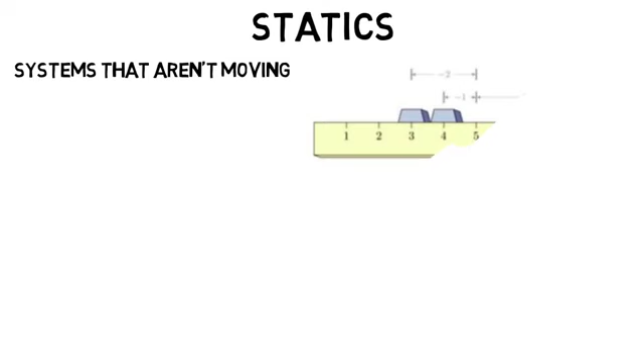All civil engineers will take a class called statics, which is all about the forces and systems that are not moving. In basic physics, you may have done a statics problem, like where does this support have to be for the system to be totally balanced and therefore not moving. You summed all the forces which equaled 0 and all the torques which equaled 0. And that's the basics of statics.

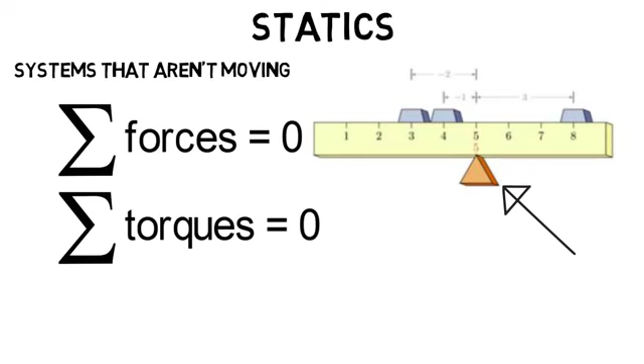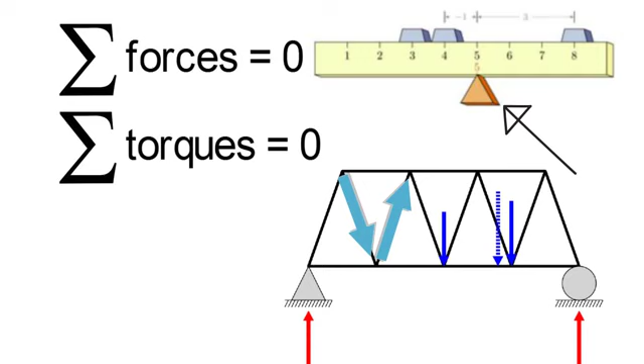So if you're looking at the forces within a bridge or truss, well, the same principles apply, but now there's just more to it. The weight is straight down as shown in blue, all the beams exert forces on one another, but the sum of them is equal to 0, and the torque sums to 0 as well because the bridge is not moving. And it's of course even more complicated than this, but if you enjoyed that kind of basic physics you see above, then you'll likely enjoy the statics and physics you see in structural engineering. So that's just a very simplified explanation, but now let's dive into some of the classes they would take.

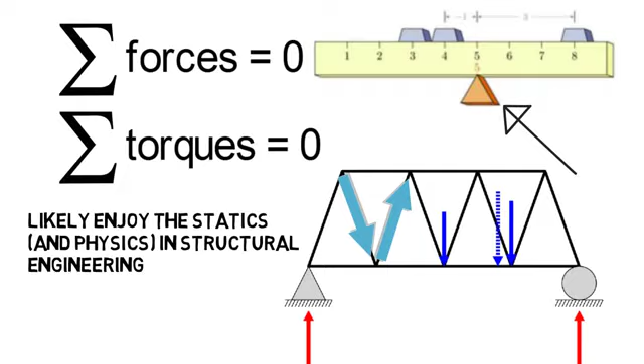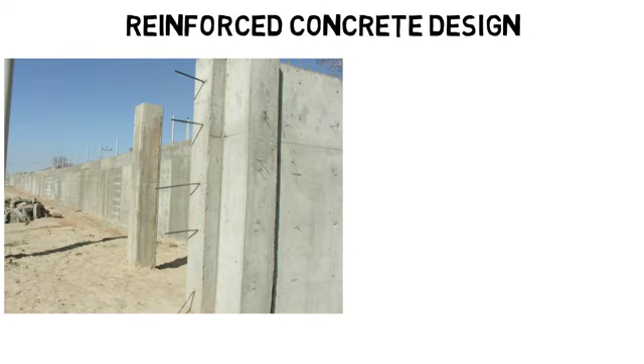One class that would be important for structural students is a reinforced concrete class. In concrete structures, they reinforce it by putting steel beams in the concrete. We can't see those beams, but here, before construction is done, you can see them sticking out. Or you can see a lot of them on these unfinished columns. So why do they do this? Why isn't concrete good enough?

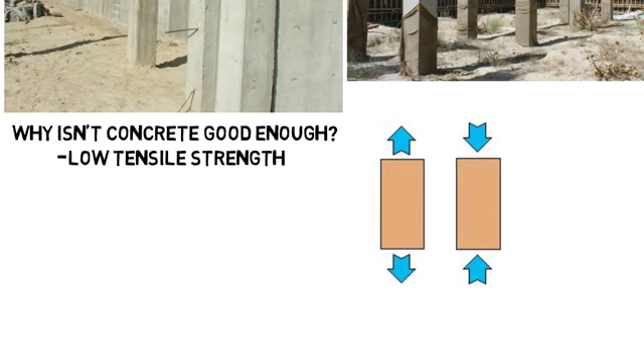Well, concrete alone, once hardened, has low tensile strength, as in it does not handle being pulled very well. However, it's okay with being compressed. But to counteract that low tensile strength, they add steel beams and pour wet concrete, which hardens around them, and then those steel beams have high tensile strength to counteract those types of forces on the structure.

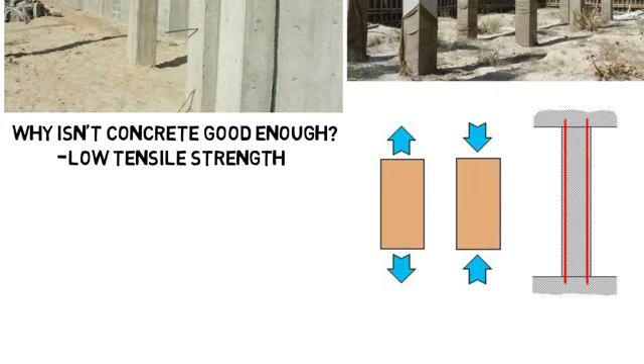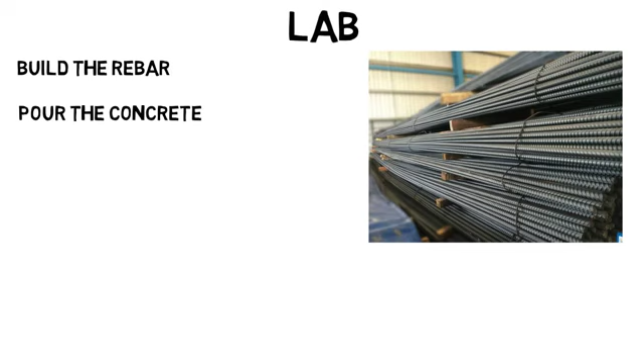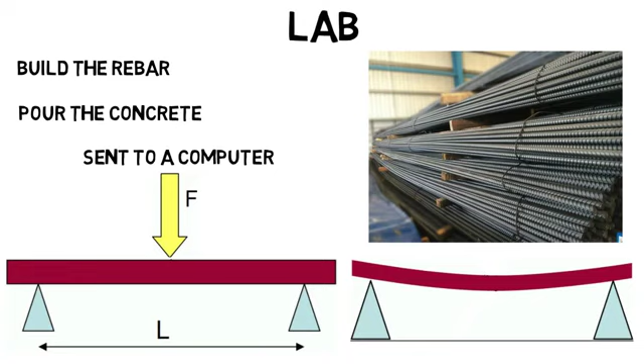So in a lab for this class, you might build the rebar, or the steel reinforcing rods, pour the wet concrete onto them, then once it dries, use a machine that holds the beam on both sides, then apply forces in the middle and keep increasing the force until the beam breaks or cracks and starts falling apart. That force being applied is sent to a computer that tells us the loading on the beam so we can collect the data and get the properties that we need.

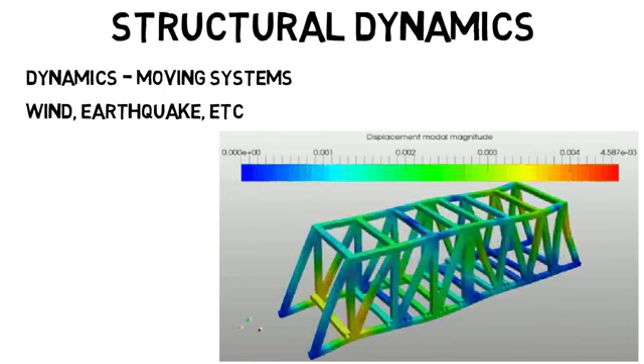You could take structural dynamics as an elective class. Dynamics is about moving systems, unlike statics. So this is one of the few classes where motion is included. So whether it's wind or an earthquake that shakes a building, you need to know how that motion will impact the structure itself and all the forces within it. I've shown this animation before, but mostly for mechanical engineers as it's a vibrating system that they could analyze, but civil engineers could get into this as well. They have to make sure their designs can stand up against any type of movement the structure may be subject to.

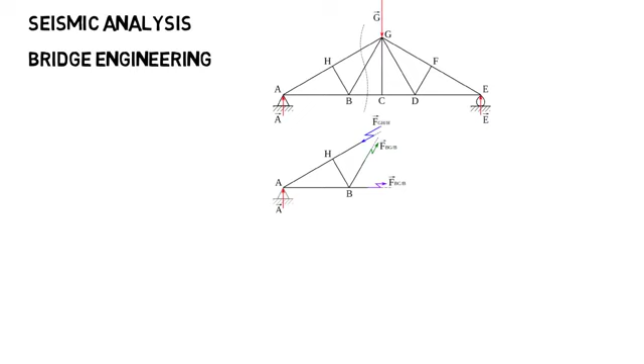You could take an elective class on seismic analysis, which is specifically about calculating the responses of a structure to an earthquake. Or one on bridge engineering, which would be a class on highway bridges, materials used, distribution of loads, and how forces are spread throughout the structure, and so on. Mechanics of materials, like how twisting and bending a beam or column causes it to become internally stressed. Timber structure design, which is about analyzing properties and forces within wooden structures, and much more.

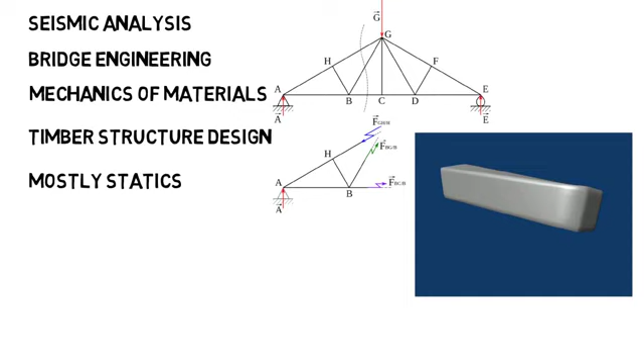You may still have to do hand calculations, but most of the rigorous analysis you learned in school will be left to the software.

Now let's move on to geotechnical engineering, and you'll already see how different these disciplines are. Geotechnical engineers are concerned with the behavior of earth materials like rock and soil, but the main focus is soil. This may seem odd, but you'll see how important this is.

The structural engineer can do everything right to make sure the building will stand up, but if the geotechnical engineer messes up and you put a structure on soil that can't withstand it or is uneven, the building could fall, sink into the ground, or even lean to one side, probably the most famous being the Leaning Tower of Pisa, which was a result of soil issues.

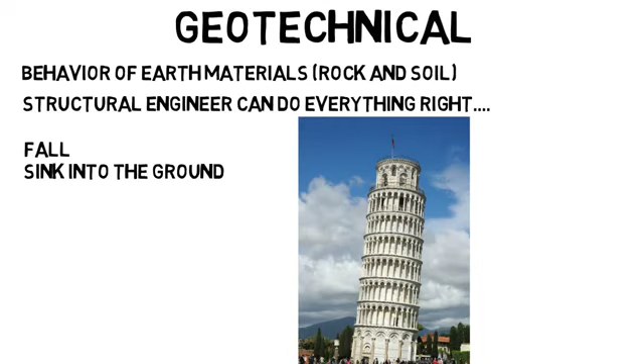Then they also have to consider the foundation of the structures that are being designed, like should they have a shallow foundation or a deep foundation. You may not realize it, but our houses and all the buildings you see have foundations that go underneath the earth to keep the structure as stable as possible by transferring the weight from the structure to the earth.

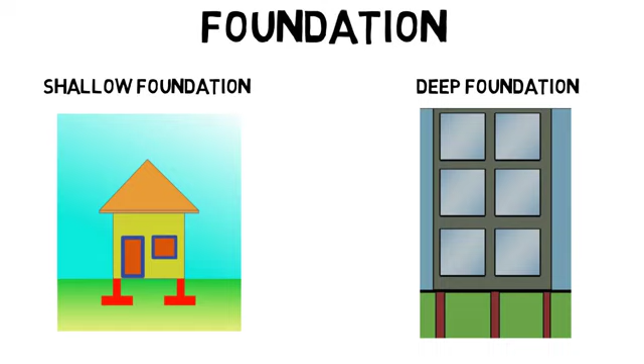But geotechnical engineers rely heavily on testing. So a lab you might see in college is to go out as a class and collect soil samples around your university and bring them to lab. You would have to classify it, like is it sand, gravel, clay, etc. There are many soil types, and you may have to look at the grain size or how it reacts to water.

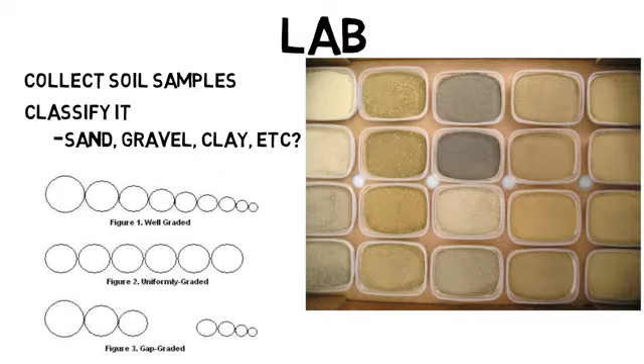You determine its water content by analyzing the sample, which will be comprised of solid soil, water, and air of different masses and volumes. But most importantly, you'll measure how the soil will react to mechanical loading or to different forces acting on it. So you might perform a triaxial test, for example.

Too complicated to explain for this video, but essentially you put the soil in an enclosed area and apply a force or load to the top, which pushes down on the soil. Then pressure sensors measure the pressure at different points to see how the soil is being affected.

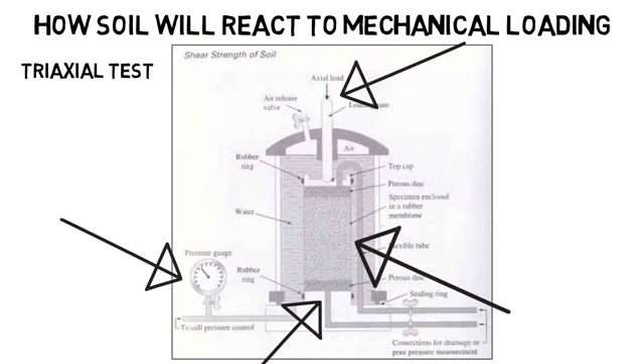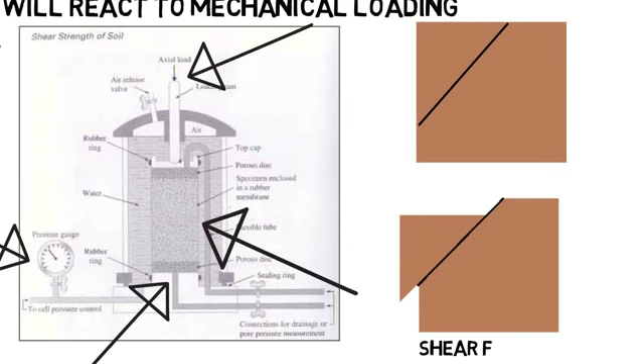If you imagine a square sample of soil and you add a force to the top, the soil can fail along some weak plane. Basically, the weight overpowers the friction holding the soil particles together, and the soil will start to slide, which is known as shear failure. Its ability to stand up to this is known as shear strength, which is one thing that the triaxial test on the left tests for.

And this leads us to what a career in geotechnical engineering could be like. You might be the person who goes out to the field where a structure is going to be built and collects soil samples all around the area for testing. Or you could do testing at the field.

One of the most used tests right now in this field is cone penetration testing, where a large truck goes out to the field which has all this equipment on it, and a cone is pushed into the soil, and the pressure will be monitored by a computer on the truck as it moves through the soil into the earth. Based on the pressure, you can analyze the soil mechanical properties.

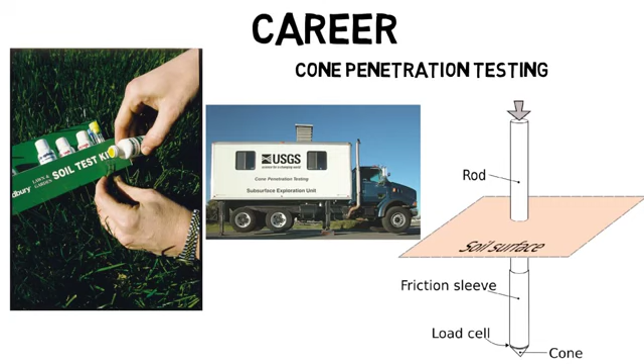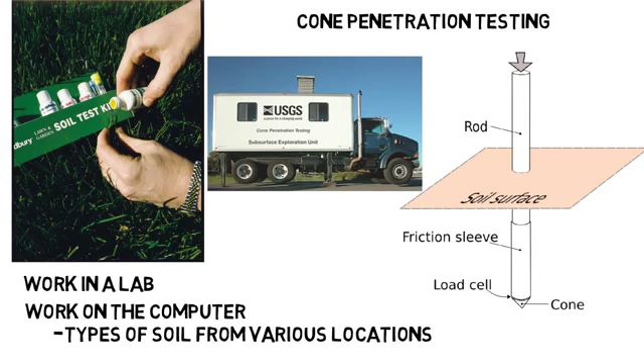Or maybe you could work in a lab where you would do the testing on the soil after it's been collected, like I showed with the triaxial test. Or maybe you could work on the computer and input the different types of soil from the various locations at the site so you can digitally lay out the area that the structure will rest on. So you could be in the field, in the lab, or on the computer.

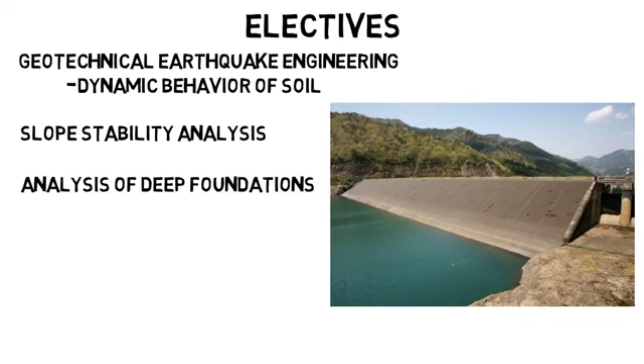Your elective classes could include geotechnical earthquake engineering, which would be like learning the dynamic behavior of soil as opposed to the structure itself. Then slope stability analysis and how to safely design structures on slopes. An example would be an embankment dam. Analysis of deep foundations, where the structure goes deep into the earth for a stronger support, like for skyscrapers. And of course, there are many more classes.

Now let's move on to water resources engineering. This is about the design of systems to manage human water resources. They can work on a water treatment facility, designing dams, pipelines, channels, canals, and so on. Maybe you have to design a storm drain system in the event of a large storm. Where is all the water going to go, and how will you get it to the ocean efficiently?

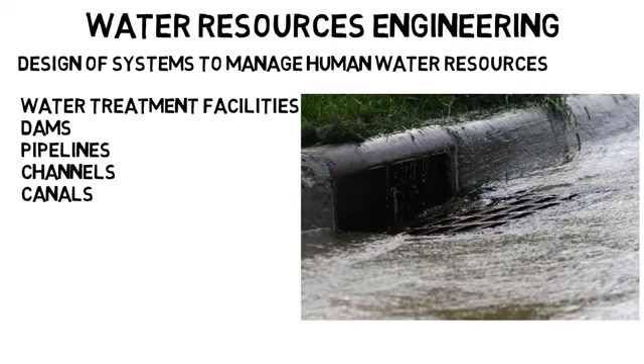Or you could design a canal, which is an artificial waterway to transport water for irrigation, or it can be used for ships and boats. Or you could design a culvert that will allow water to flow under a road or trail or some other obstruction.

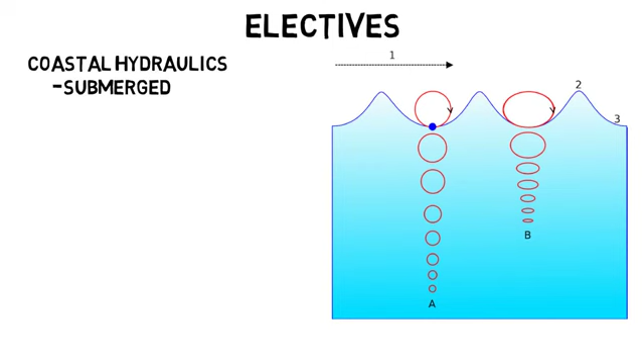Elective classes you could take include coastal hydraulics, where you learn about ocean wave propagation, submerged pipelines, seawalls to protect human habitation, and so on. Or open channel hydraulics, which is about fluid flow in an open channel as opposed to a closed channel or pipeline.

And last is transportation engineering. This is about safe and efficient movement of goods and people. These are the engineers who design streets, roads, highways, railroads, public transportation systems, and even airports.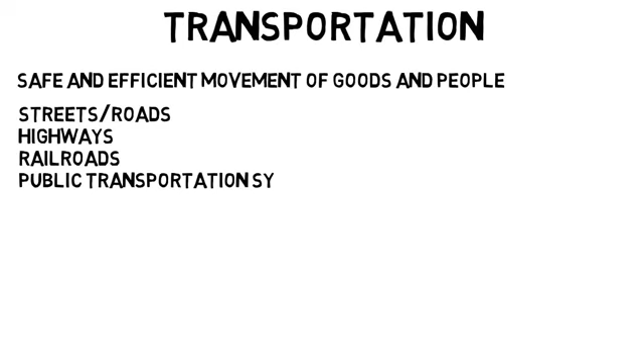So maybe this engineer has to look at the kind of demand from a new development, whether it's a new stadium in your city, all the way to a new grocery store in a new location. This is going to cause new types of traffic throughout the area. The engineers would try to optimize how the new development impacts existing traffic.

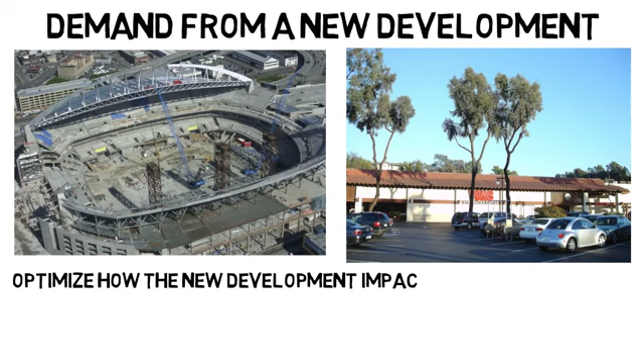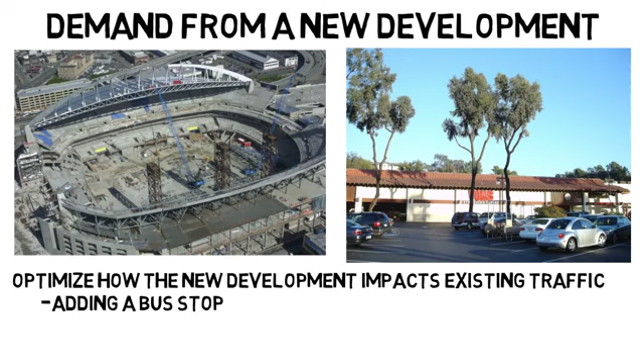They would look at data from other similar places to see what kind of traffic they get, then try to make improvements where possible. It could be simple like adding a bus stop in the nearby area, all the way to expanding the roadway to allow for more traffic.

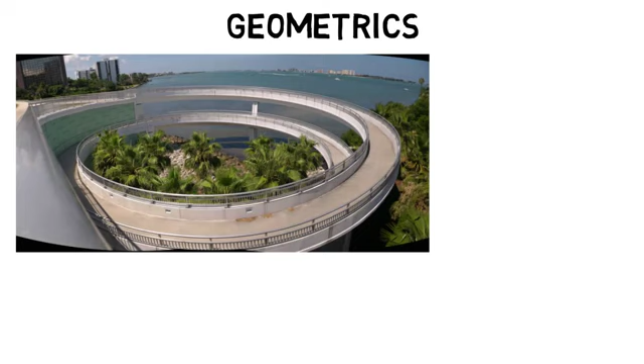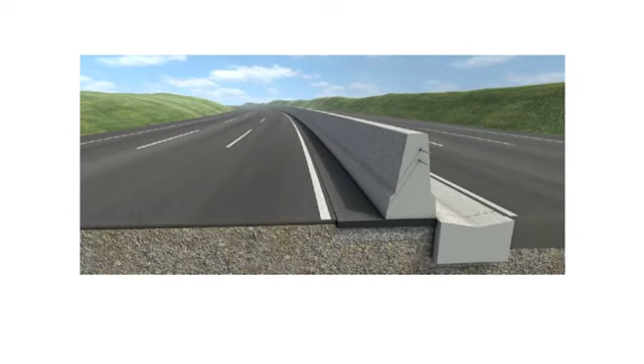They could work on the geometrics of the roadway, such as what radius of curvature does an off-ramp have to be for a car going 55 miles per hour so the tires won't slip. Or if they're going up an incline, the driver needs to see far enough ahead of them to stop if there's a sudden obstacle. Or what do the cross sections of a freeway need to be for the lanes and the shoulders to accommodate the amount of traffic that's expected?

Or let's say a highway interchange is being designed. A structural engineer would make it stable and design the structure itself, but the transportation engineer would determine maybe how many lanes are needed for the interchange based on traffic, or how the merging should happen to maximize safety. They make sure that the layout is designed to maximize traffic flow and safety rather than the physics of the structure itself.

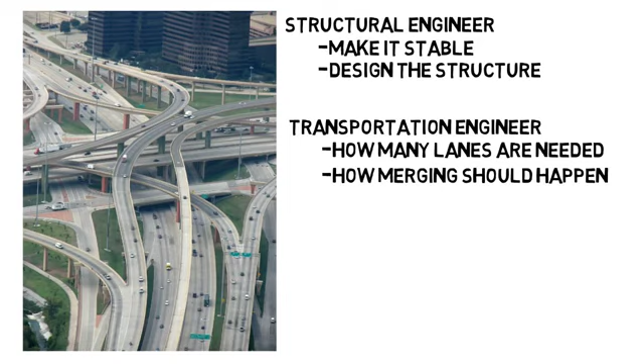Often these engineers evaluate potential improvements to cities in terms of transportation rather than create a totally new design. As in, you probably haven't had many new highways put into your city in the last few years, but there's probably been plenty of construction, whether it be adding an express lane or a bike lane, etc.

So they might not create a new bus transportation system, but they may optimize the existing one. Maybe they take data from how many people get on the bus, how long the bus takes to complete its route, how long people are waiting for the bus, and so on to optimize the route, the amount of stops, and more.

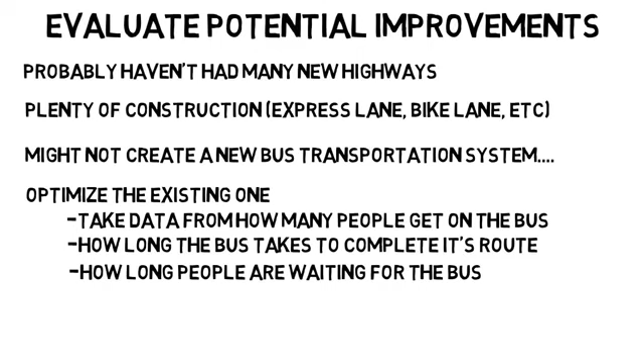Your career will also likely involve a good amount of computer work. You might have to create a layout of the new lane, off-ramp, bridge, or whatever you're designing on AutoCAD, which is a very important software for civil engineers. Or you could use software to analyze and simulate traffic.

You could actually lay out the roadway of a city and use collected data of traffic during different times of the day and simulate new additions. Like you could add in a stoplight somewhere and see what the new traffic would be like. Or you can make a minor change, like make a certain stoplight stay green for just a few seconds longer and see how it affects traffic on those streets.

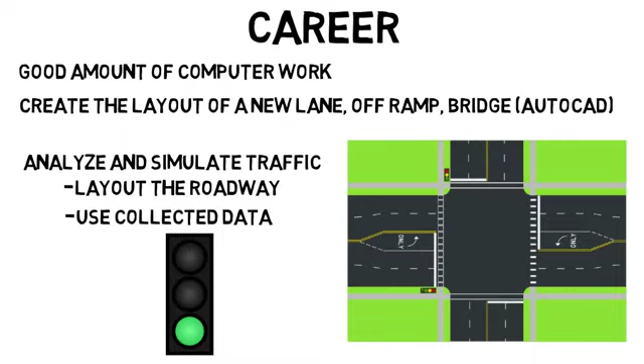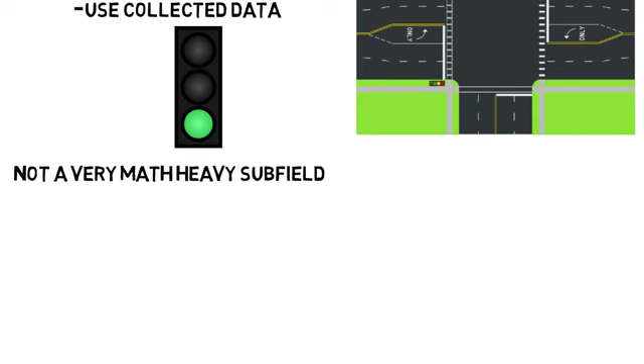And just note, this is not a very math-heavy field. In fact, it's probably the least math-intensive of the 4 subdisciplines I've talked about. It's more about taking data and analyzing it. Even when I talked about the radius of curvature and how fast someone should be going, you won't use the coefficient of friction and do circular motion physics or anything like that. You use even simpler equations to get what you need.

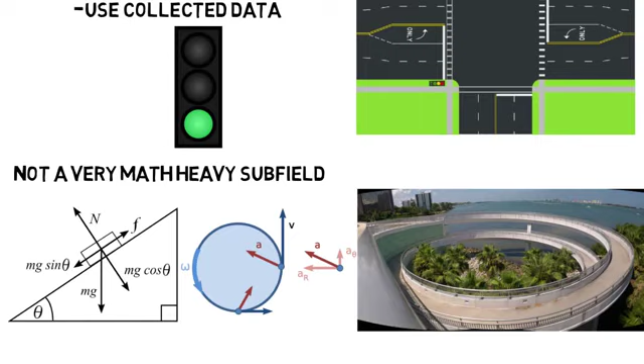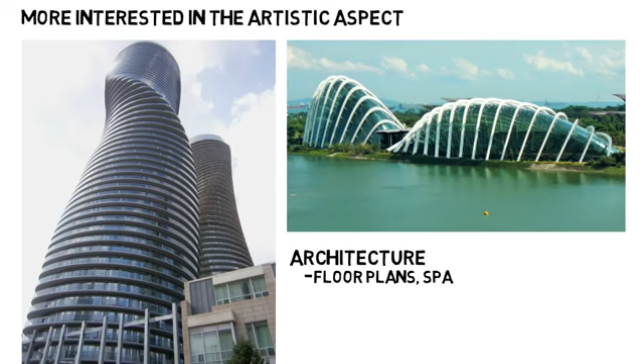Now that's all the main subdisciplines of this major, but there are some final thoughts I want to include. If you're watching all this and are more interested in the artistic aspect of building and structure designs, then architecture will be better for you. Architects deal more with the floor plans, spatial concerns, and the shape and design of the buildings. They have to have an understanding of structures and physics, but not quite as much as a structural engineer.

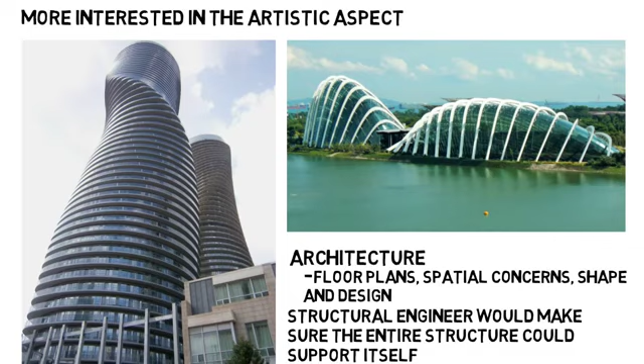They would hand off their design to the structural engineer, who would really make sure the entire structure could support itself, and they would deal with more of the technical work. Then, if you want to be the one who puts on the hard hat and does all the hands-on work with the machines and physically builds the structures, then construction will be better for you.

But then there's also construction management, which you can still get a job in as a civil engineer. Construction companies will hire civil engineers because of their technical background. Construction is the hands-on part, but construction management is more about guiding the construction, putting together schedules, budgeting, and figuring out how all the pieces will come together.